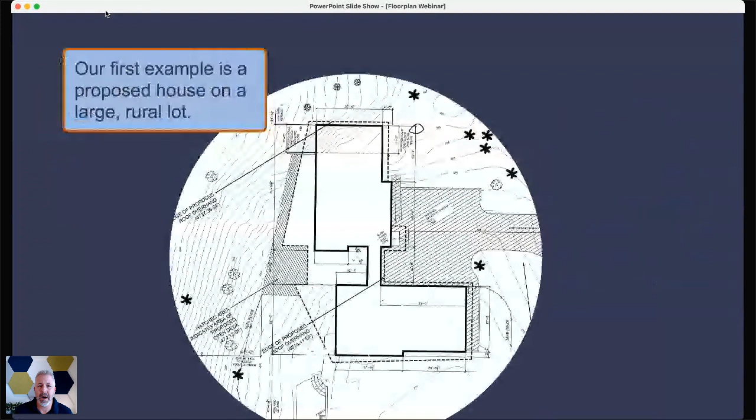So let's focus on the site plan for just a moment to set the stage for the floor plan. Our first house is a site plan of a house on a larger rural lot. The site plan is often one of the first plans you're going to see, and it's often based on a survey done on the property that shows where the property lines are and where the corners of the house are on the property.

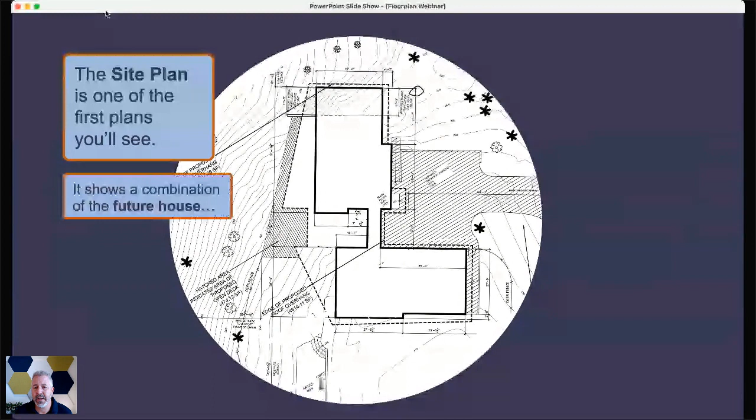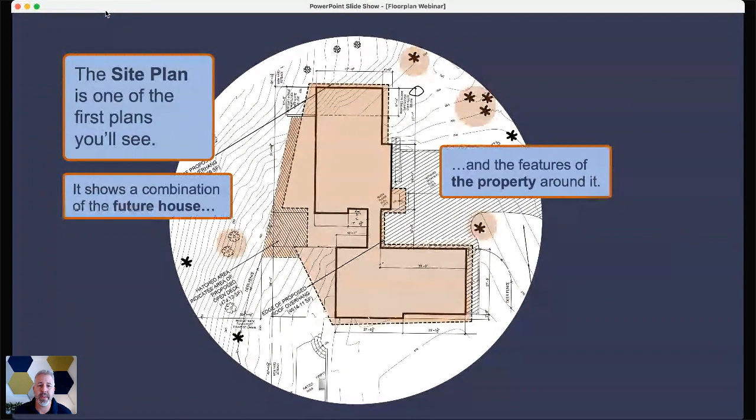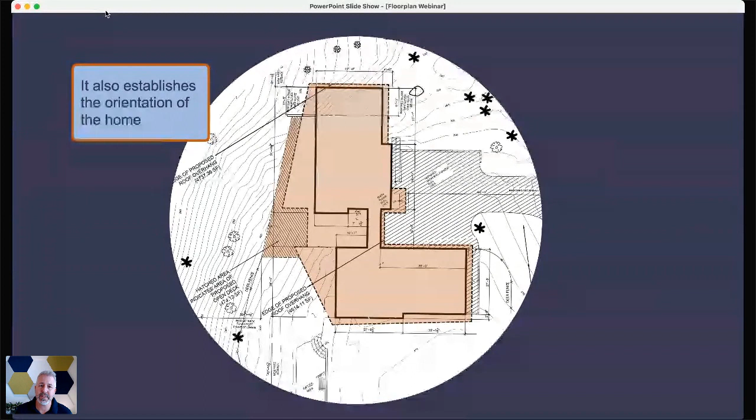It shows a combination of the future house on the site plan, as well as the features on the property around it. In this example, I'm highlighting trees that are part of this plan. It also establishes something important about the orientation of the house — for instance, if a house is facing a view, it's really important to make sure it's oriented in the right way so that it maximizes that view. By seeing the house in the context of the property, you can get a very clear idea of whether that orientation is correct.

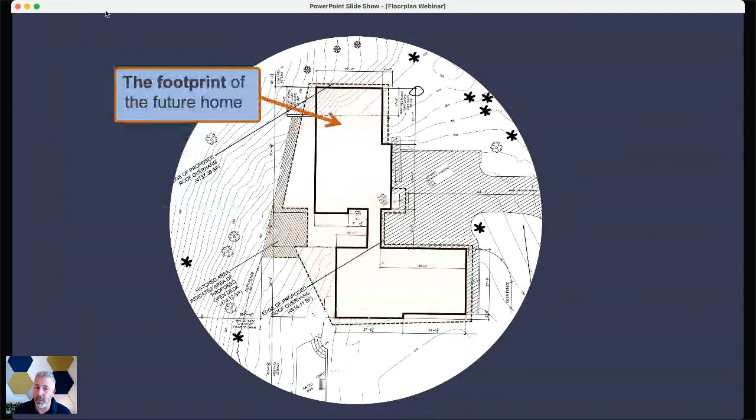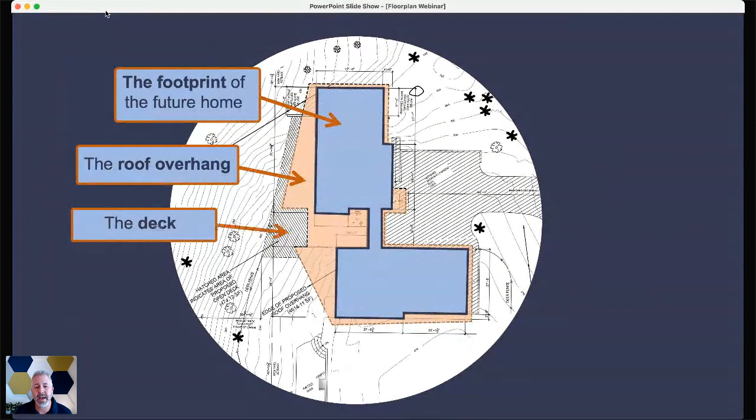So in the site plan, you'll see a few different things, usually indicated with different marks, like lines and hash marks. You'll see, of course, the footprint of the home, which is the insulated, lived-in area. In this example, we also see the roof overhang, which is important considering the orientation, because in places where the sun hits the home, you might want more or less overhang. That's an important thing to note, along with built things like the deck and the driveway, giving you a sense of the proportion and scale of all those things relative to the house's footprint.

Looking a little more closely, there are lots of lines and numbers here. One thing to notice is some basic home dimensions — in this case, this side of the house is 27 feet wide. The architect or designer are likely to add some notes about how the house is going to be constructed from a high level. For example, there's a note here about how this part of the house is going to be cantilevered over a sloped part of the ground.

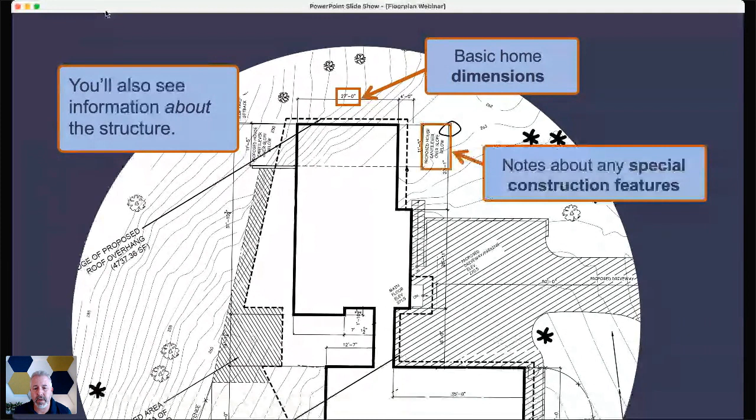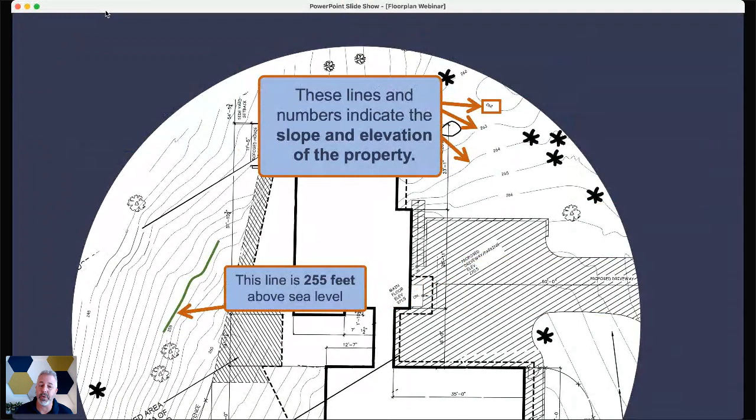Also, another really important piece of data about the home is the finished floor elevation, which is marked there. You'll also see these topographical lines that indicate slope and elevation. There are just a couple of key things to know about these lines and numbers. For example, if you look at the lower left here, you'll see this green line, and beside it on the plan there's the 255 feet above sea level number. Each of these lines represents 1 foot of elevation change.

So if I highlight another line here that's 245 feet, what the plan is telling us is that between these two lines is 10 feet of elevation change. And so when you're looking at the plan thinking, okay, here's where the deck is, what am I going to see when I look out on the deck? Well, you're going to see the ground sloping down away from you. That's an indication of the topographical look of the property.

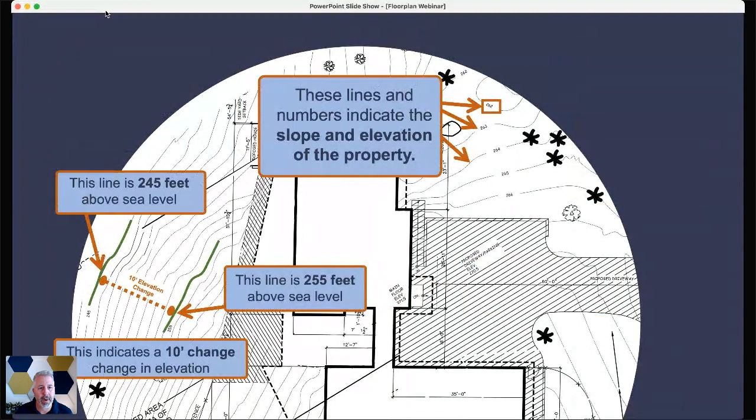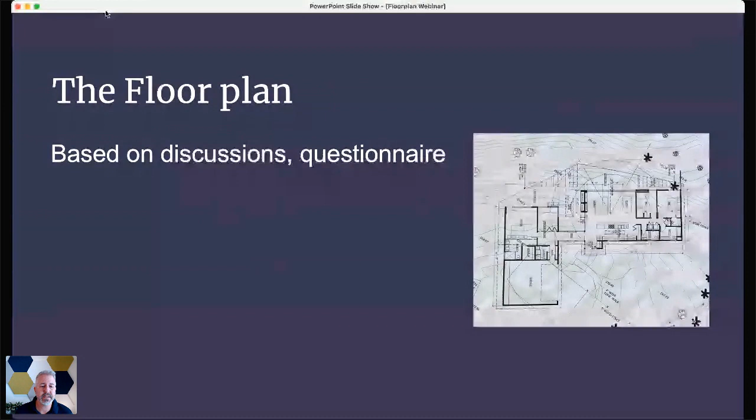So with those basics in line, let's go ahead and look at a floor plan. The floor plan is often based on discussions or a questionnaire where you've worked with a designer or architect to understand your needs, your lifestyle, your expectations, and budget. And it's really the source for the construction project.

Once the plans are permitted, you have a building permit, and everything is set, then it is the source for almost every team that's working on the project to be able to see where things go, how big or small they are, and how to build them. And really, the message of today is that the plan is an opportunity for you to design your home, to be a part of that process, and to be able to work productively with the architect or designer.

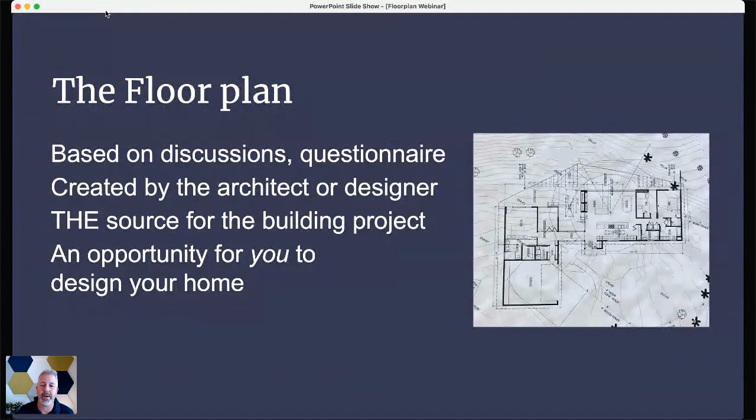So in the process of creating the Navigator course, we interviewed a lot of homeowners about their experiences and what they had learned. One of them, Darren Barefoot, used to work in stage productions and working with set designs where they have to get these sets on and off the stage for each scene. He told me a mantra they had at that time: if it ain't on the page, it ain't on the stage. I think that's a great mantra for homeowners to have when they're thinking about the floor plan, is if it's not in the plans, it's not going to get built.

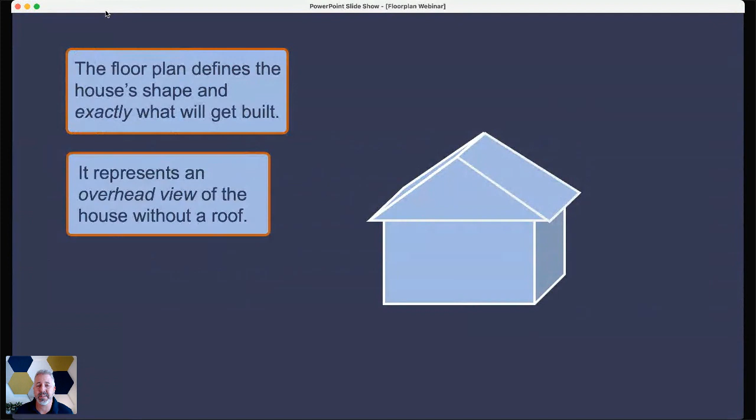Because the plans are the source, you've got to be really detail oriented and make sure that you understand how things are going to be built. The floor plan really defines the house's shape and exactly what will get built. You can think of it as representing an overhead view, as if you could take the roof off the house and look down—what would you see? That's really the floor plan.

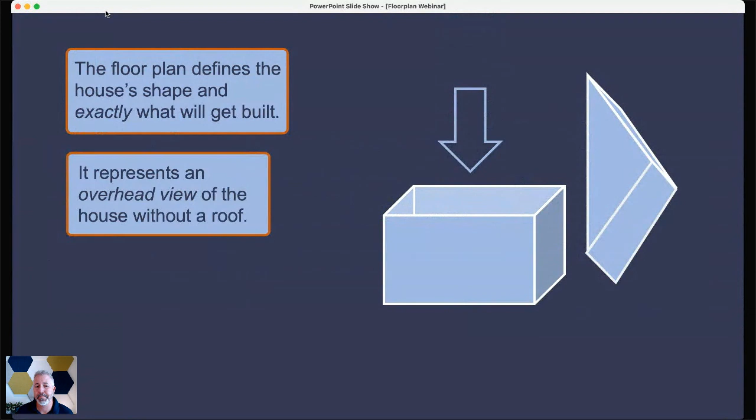So we're going to be using this example, which obviously looks quite complicated, but we're going to make sense of most of it. This version combines multiple elements, including windows and door specifications. Your architect or designer may have a different approach to the floor plan, so just note that your mileage may vary—these are not perfectly standard.

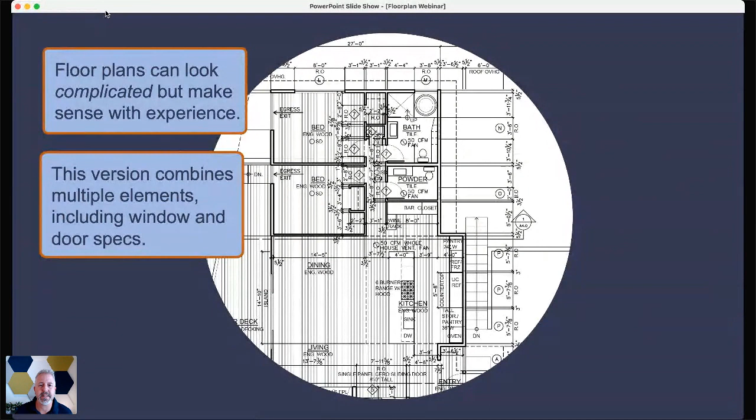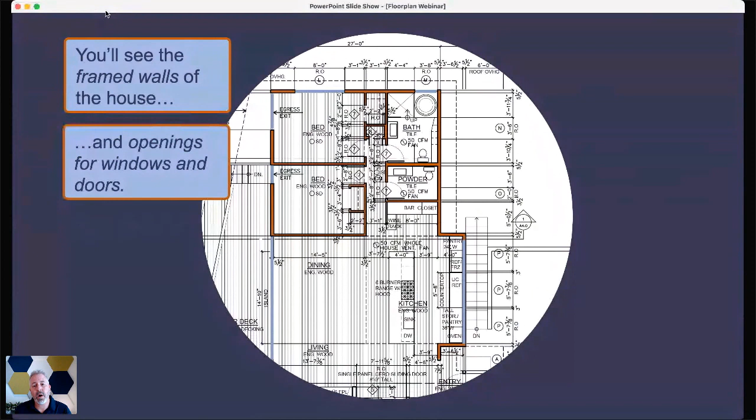So, of course, you'll see the framed walls of the house. These are often insulated walls or walls that define rooms, along with windows and doors. You'll see here in light blue. So the combination of walls, windows, and doors should represent everything that surrounds the home.

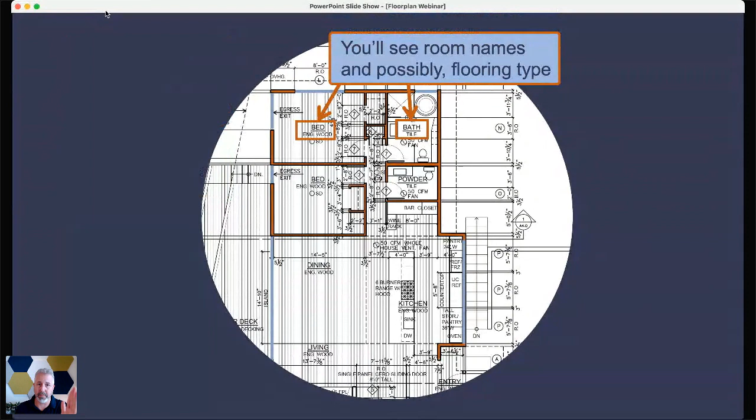It also includes the locations of features, fixtures, and appliances, and we'll talk a little bit more about that later. There's also things you're likely to see like code required elements. This is an example of showing the egress from a bedroom or a smoke detector. Part of the reason this is here is so that when a building plan is being reviewed by the people doing the permit, these things are very clear that they can see that. This helps your plans get through the permitting process by them being very visible in the plan.

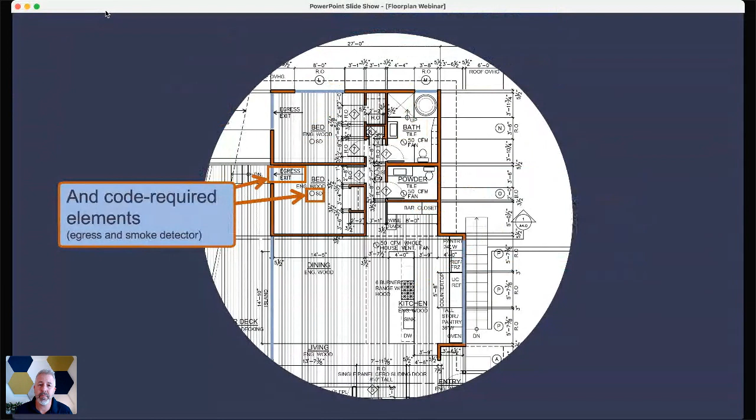So let's look at a couple of little details here that you're likely to see. You can see inside the circle here, there's the abbreviation RO. This stands for rough opening. So there's going to be a window here that's 8 feet wide, and that means when the framers build the building, they will have a rough opening of 8 feet. Then later, when you order windows, very detailed measurements will be made to construct the windows. So everything starts with a rough opening, as you can see here.

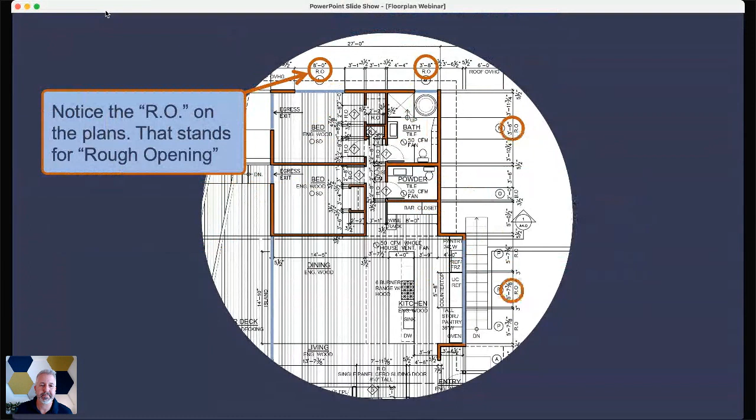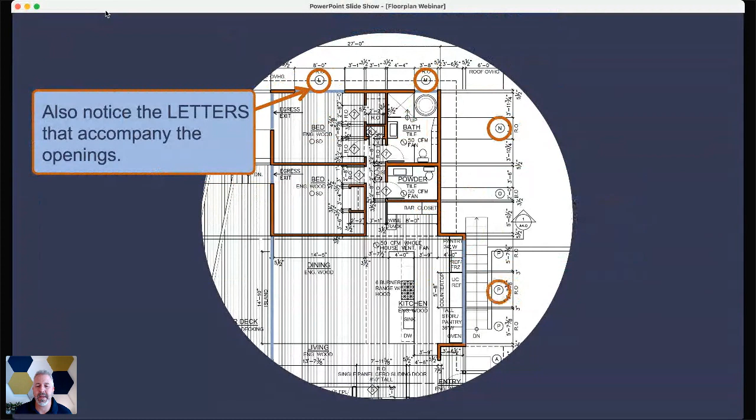So along with these rough openings for each window is also a circle with a letter in them. You can see here we have an L, M, N, P. These indicate the type of window for each opening.

Each of the letters maps to something called the window schedule, which is often part of the floor plan. It may be on its own sheet, but each of these letters is connected to a table that shows data on each kind of window, and also probably a diagram with dimensions, showing which way the windows open. Once you know how to read this part of it, you can go through every window in the plan and double check that it's the window you want, working the way you want.

So this is a key thing to notice.

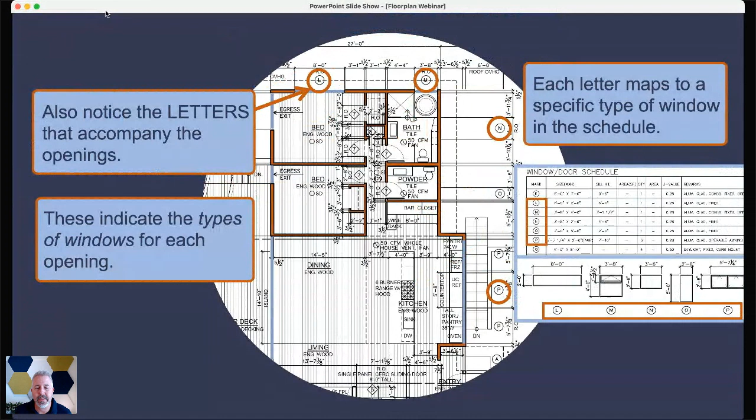Same is true with doors. We'll look at interior doors here. You can see that the doors in this hallway all have the number 7, so these are using numbers instead of letters. On the door schedule, a door with a 7 is a 2 foot 6 door by 7 foot door.

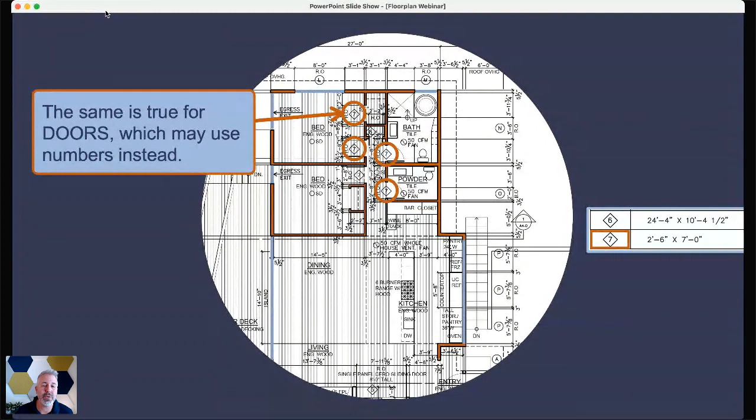As the homeowner, you can say, you know what, I think I want wider doors. What if we had a 3 foot wide door instead, or something in the middle? That's totally possible, totally something architects and designers are happy to work with you on. So keep that in mind as something you can make bigger if you want.

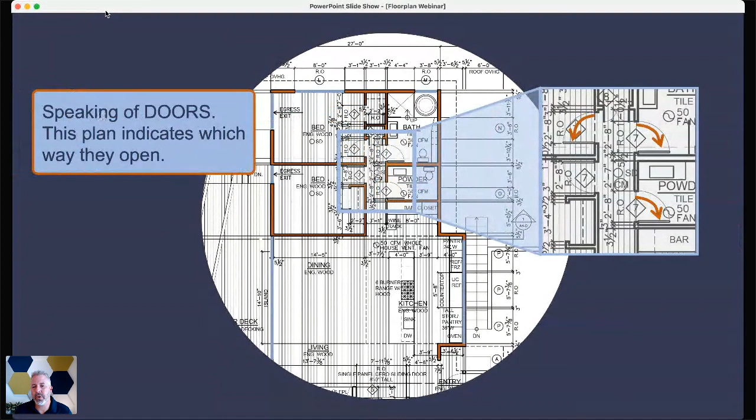Speaking of doors, this plan indicates which way they open or swing. You can see in the diagram that the doors have little lines showing which way they swing. This can seem like a small detail, but it really matters for the convenience and livability of your home, because once the doors are ordered and arrive, it's much harder to make them work differently. So you want to be really diligent about making sure they work for you.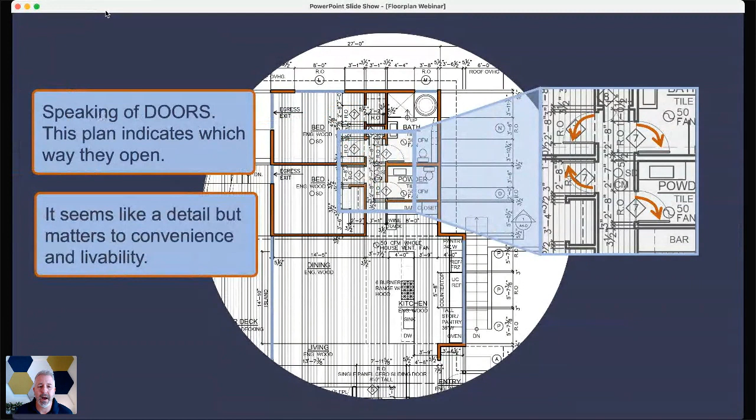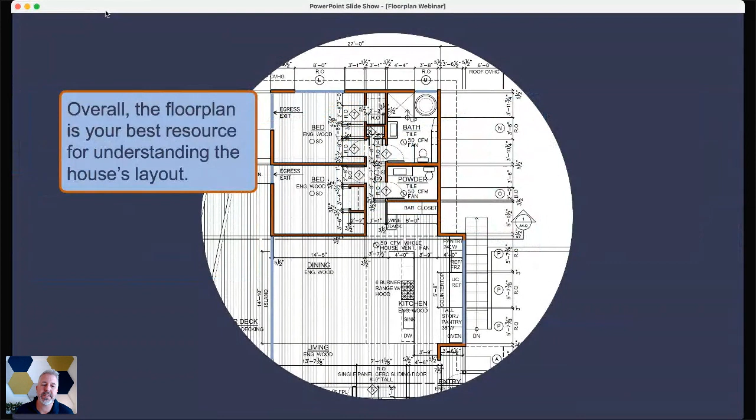Overall, the floor plan is really your best resource for understanding the house's layout, and the layout really relates to convenience and livability. I'm going to show you a couple of ways to think about that.

The first is this idea of flow. A really important point here is imagining how you'll use the space, like what paths are most common. I'll show you a couple here. This is from the bedrooms to the bathroom, something people are going to use multiple times a day, probably, and making sure it works the way you want it to is really important.

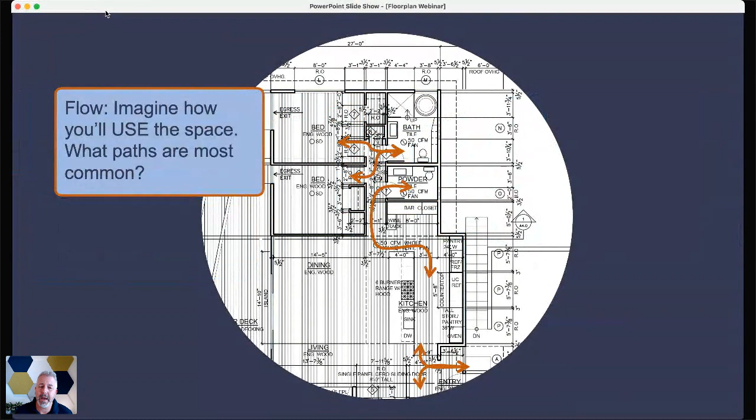Another one is moving from the kitchen to the powder room and back, or the entry into the home. The key here is asking yourself, on a room by room basis in the floor plan, what activities are going to be happening in that room, and how those activities connect to other rooms. What's the pattern of flow in that?

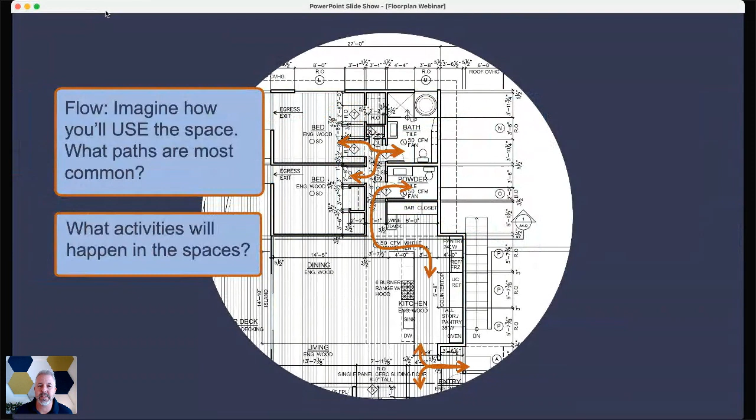Making sure the doors swing the right way and the lighting is in the right place is a really big key to maximizing floor plans.

Another thing to consider is imagining that you are standing in a doorway looking into a room. What are you going to see, what are visitors going to see? If it's a bathroom, there might be a toilet visible, or a window. You might think, gosh, I don't want visitors to see a toilet, so I'm going to make this door swing a different way, or move the toilet to a different location so that doesn't happen. Try to put yourself in the space, looking through a door, and imagine how it will work.

Another idea architects and designers focus on is alignment: are the major elements, the major structures of the house, aligned in a way that's pleasing? You want a design to be harmonious and to feel like there's a good sense of proportion. Looking at the major elements, I'm going to draw a line here - this comes all the way down the hallway and across the front of this kitchen island. You can see there's a very specific line there that's lined up really nicely.

The same thing with this exterior wall, across the other side of the house, the wall of the bedroom going across that way. And even within the bedroom, the window is lined up with the entry of the door there. These are all things to look for. If you see things, talk to your architect or designer - they're happy to help you work through what you think would be better.

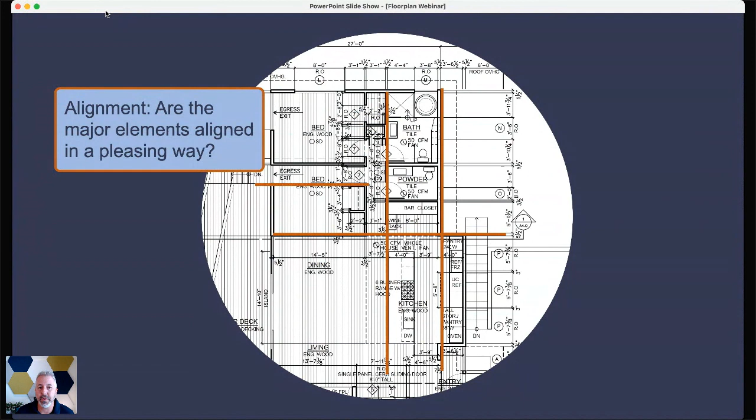So another quick example here. What we're looking at is a kitchen, and you can see there's an island here. This kitchen has 3 windows on the right side—you can see the 3 P's here. These windows are above the counter, and they really help define the kitchen space, dividing it sort of into 3 sections.

So these divide the kitchen into thirds. You think about what are the three things that are going to line up in rows here. And if you think about it starting right from the middle, in this case the range and hood in the kitchen are lined up to be exactly in the middle of the middle window. This creates a nice sense of symmetry.

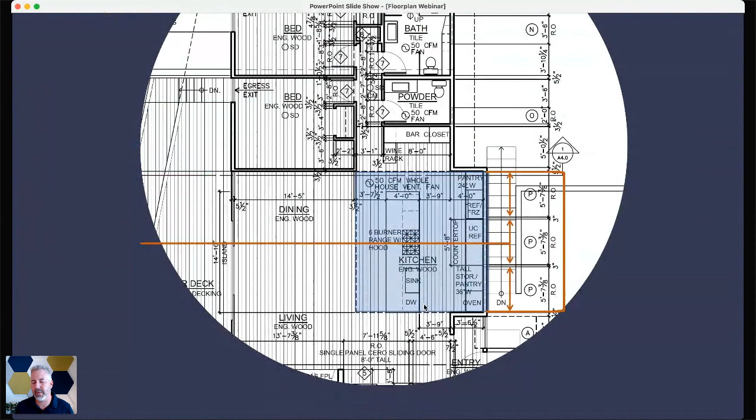Symmetry can be something that's really important. Not all builders and architects want something perfectly symmetrical, but in this case I think it's good. Again, just thinking in your plans how windows interact with the interior elements and how things are lined up is a big thing that helps it become more pleasing.

So let's talk a little more about fixtures like toilets, islands, and appliances, and these locations, because one of the keys to remember is that if you change nothing, if you look at a plan and say this bathroom is perfect, then that's what's going to get built. When the plumbers install the toilet hardware or the piping, they're going to do it like it's in the plan, unless you talk to them or make changes in the plan first. So be really diligent about that.

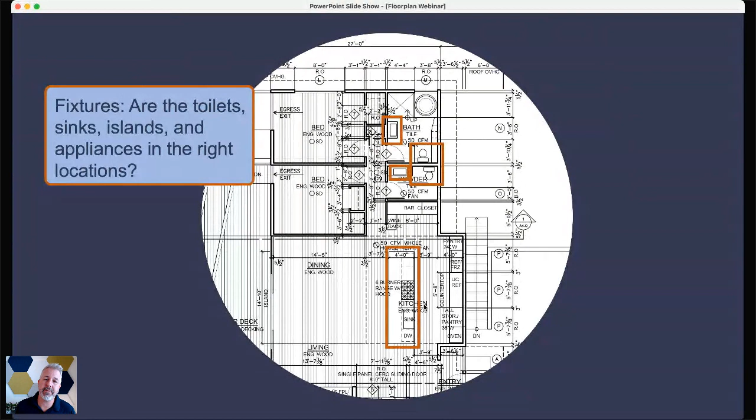Anticipate those daily activities and rituals that you do every day. An example I like to bring up is that most families make coffee or tea in the mornings, and that's something you can design for. You can think about having a coffee station—an outlet where you plug in the coffee maker, a place for coffee grounds, a sink nearby, a place for mugs, a place for coffee. It's just one small example of understanding what activities are going to happen and how the design can support it.

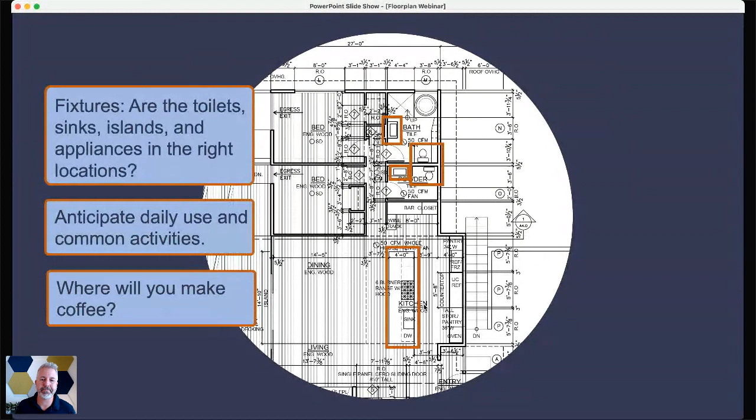So take the time that it takes to study the floor plan. I really encourage you to make changes on paper, because paper is the most affordable place to make changes. You really want to avoid glossing over the plans and trying to make changes once things become three-dimensional, because it's much more expensive.

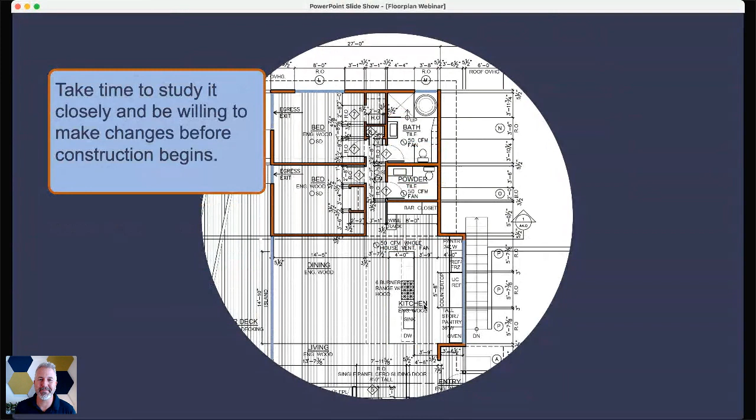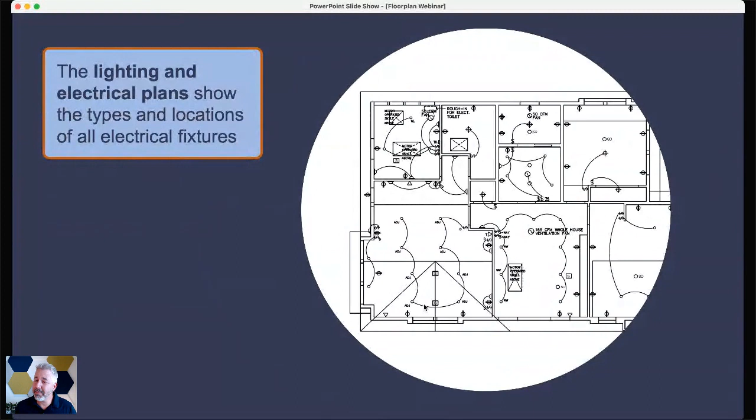Another plan you're likely to see that's really important to understand is the electrical plan. This is the example we're going to use today. It shows all the locations of fixtures and outlets and other things like internet connections throughout the home—mostly things embedded in the walls that are hard to move once the drywall goes on. So it's important to get them right early.

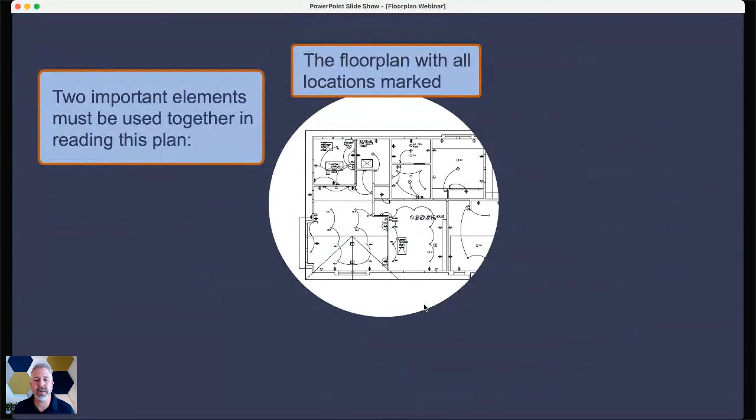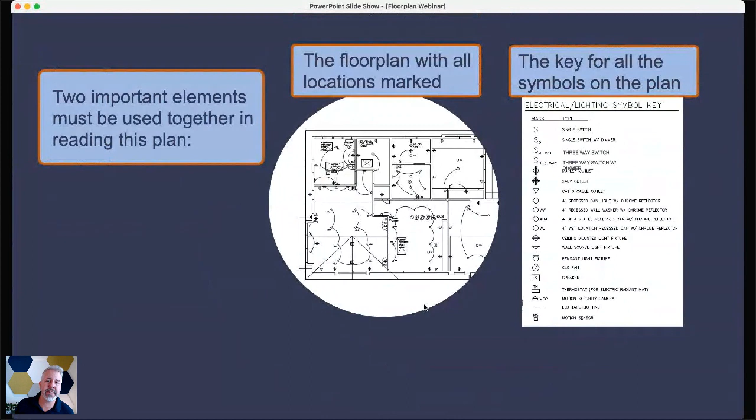Like the floor plan, there are a couple of elements that really help you understand it. The plan will have all kinds of annotations and abbreviations, and those all map to a symbol key for the electrical plan. They're pretty consistent across projects, but over time you'll learn what each symbol means and can just look at the plan and understand it. I'm going to walk you through a few of those as an example.

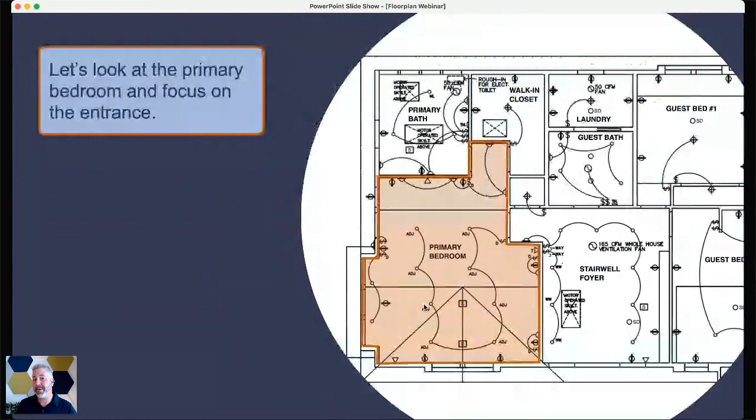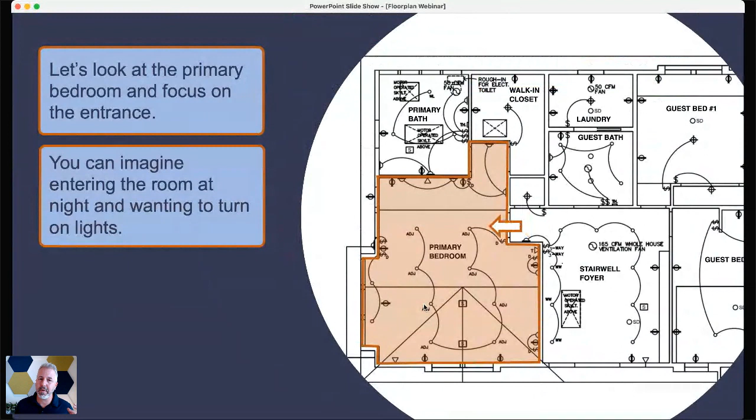Right now we're focused on a primary bedroom here. Think about it being nighttime—you're going to bed, you go through the entry, and you want to turn on the light. This is something we do every night. How does that happen, and what makes the most sense there? In this plan, we can see there's a switch by the door, which totally makes sense.

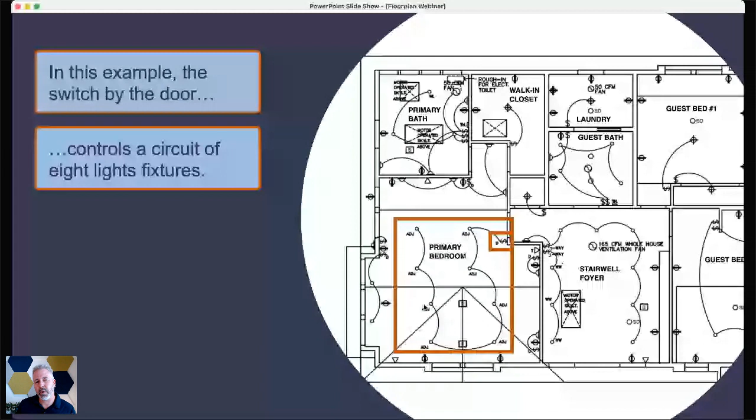We can also see that switch, because there's a line coming from it, connects to these 8 lights. So that is a single circuit—that switch controls the circuit. By looking a little more closely, we can see what that means. You see this $ and D—that's an annotation that is on the symbol key.

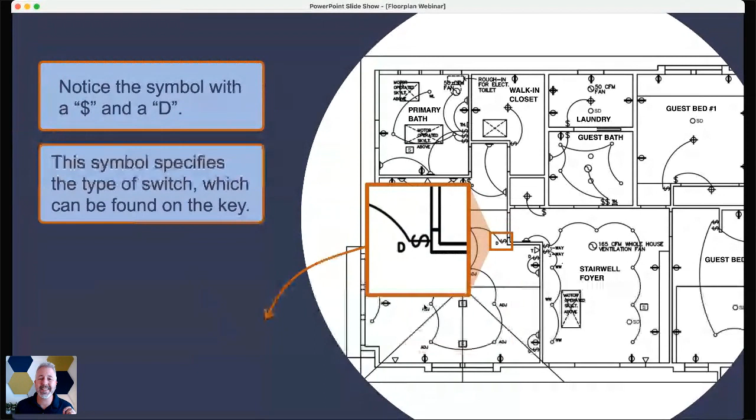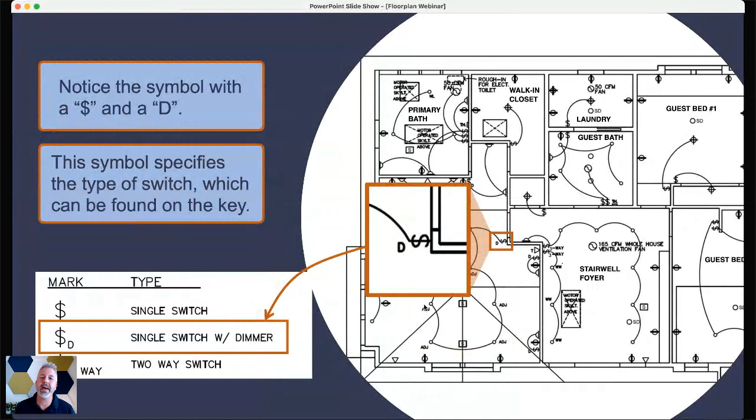When you look at the key, you'll see that means it's a single switch with dimmer. So the simple idea is that every annotation maps to the key, and you can go through the whole plan and make sure you understand what's happening at every location.

The same is true with the lights on this circuit. We can see that this also maps to the key. You can see the little ADJ there - that is a 4-inch adjustable recessed can light. So again, just an example here.

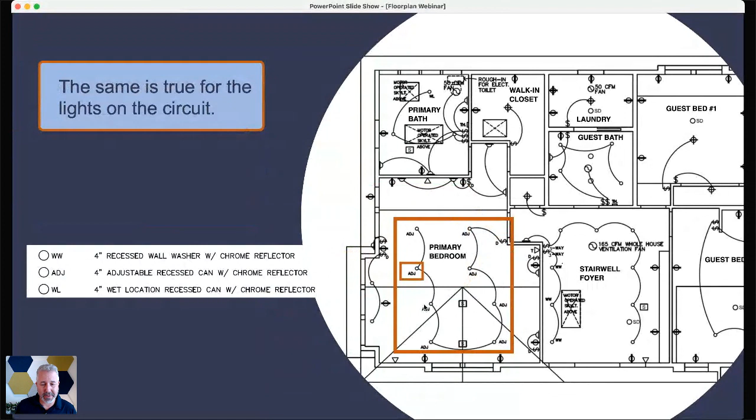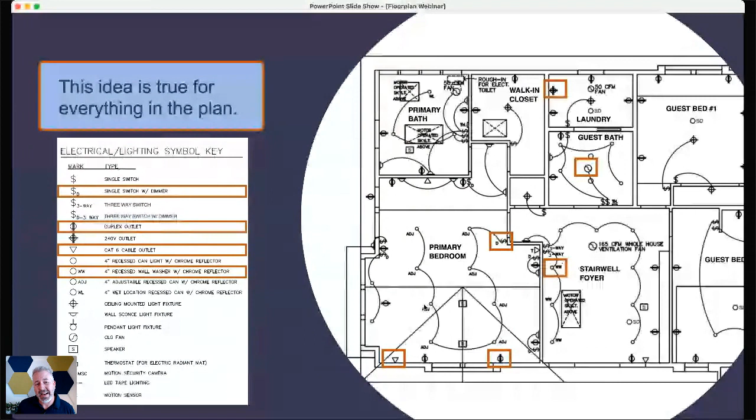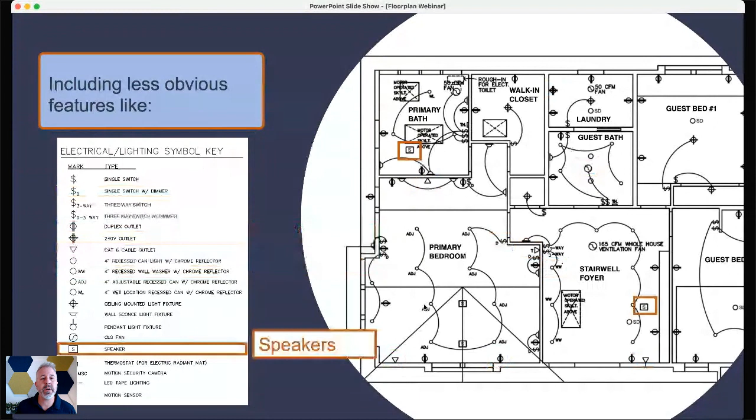So this idea of being able to identify everything happens throughout the house, and you'll see it documented. Remember, on paper this can all be changed. You can move lights, you can move switches, you can rearrange things, and that might even include less obvious things like network connections if you have an internal network, or even speakers on this plan. So lots of opportunities for improvement.

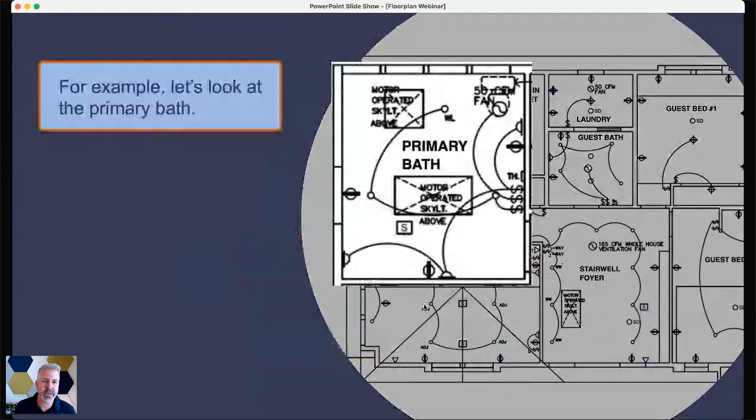So let's look just at this primary bath and talk through multiple switch situations. Here again, we're talking about entering a bathroom and wanting to manipulate the lights and switches. There are three switches designed into this bathroom.

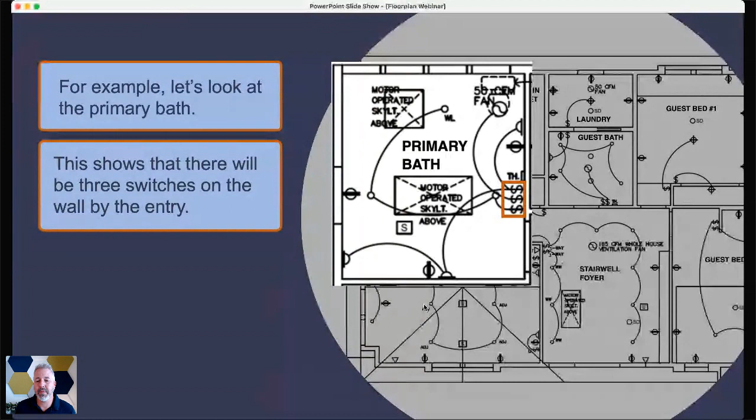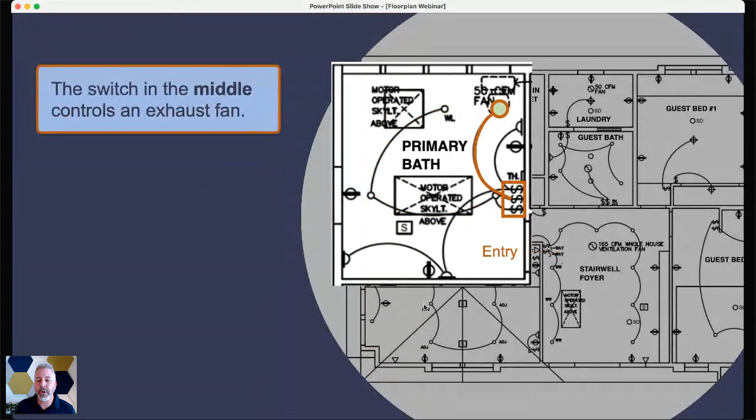When you come in the entry and turn, the switch closest to the door operates these three can lights. The second switch here operates an exhaust fan from the middle switch. And then the third light operates wall sconces around the bathroom.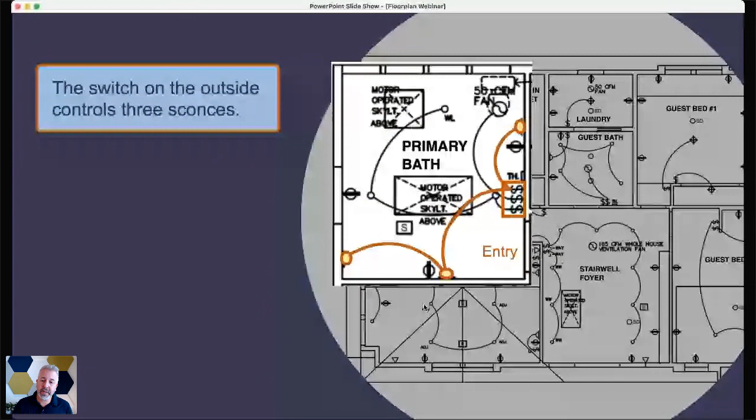Remember, if you make no changes to this plan, it will get built this way. The electricians will look at the plan and do the switches in this order. So you have an opportunity to ask yourself: are these lights in the right locations? Do I want these sconces and these can lights to be in the right place? And are the switches in the order that you want on the wall?

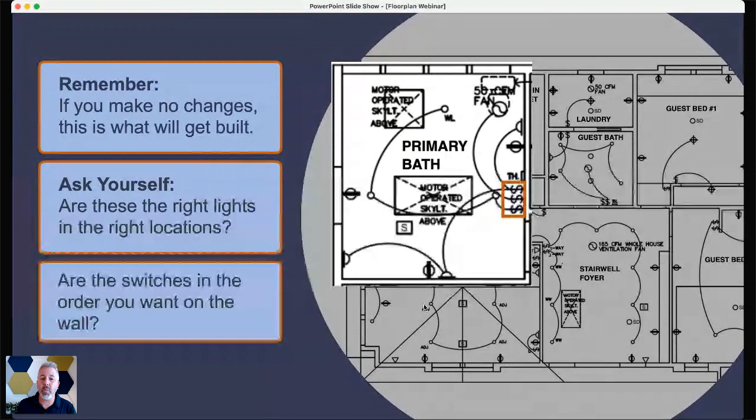Would you rather have the exhaust fan third versus second, right? These are all changes that you can make, and they extend throughout all the plans.

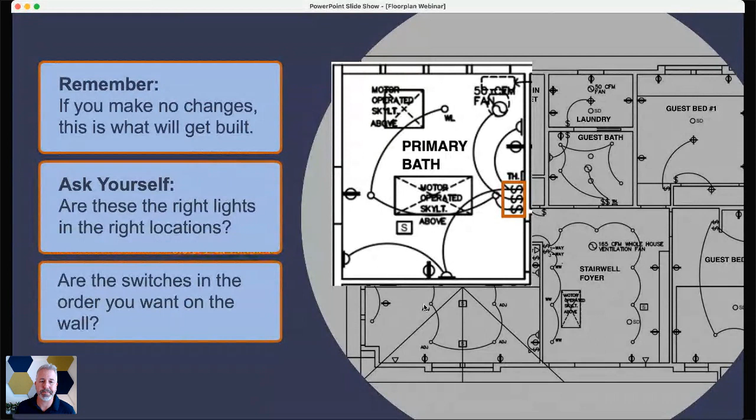So in thinking about these examples, your architect, electrician, and builder may be the best resource. I really encourage you to talk to them, ask questions, ask why things are designed the way they are. You'll learn, but you'll also find opportunities to improve.

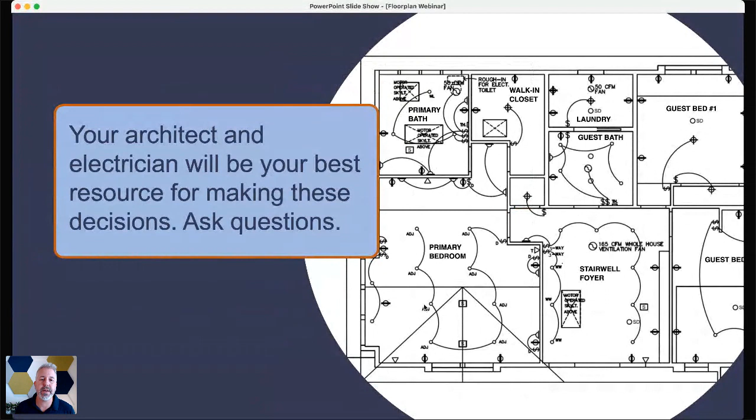So a really quick example here about three-way switches, which is a source of confusion for some homeowners. I'm hoping that this example will help.

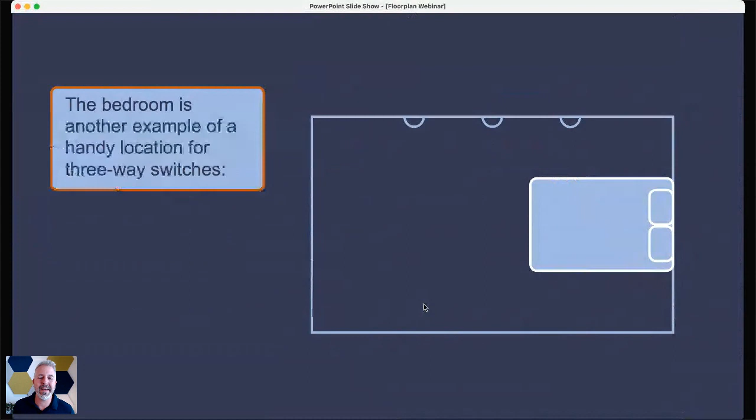Imagine that you're going to bed and you enter and you turn the bedroom lights on. So they're on, and then you walk into the bedroom, maybe you change clothes, get to bed, and think, oh, now I have to get up and go back to the door to turn the lights off, right?

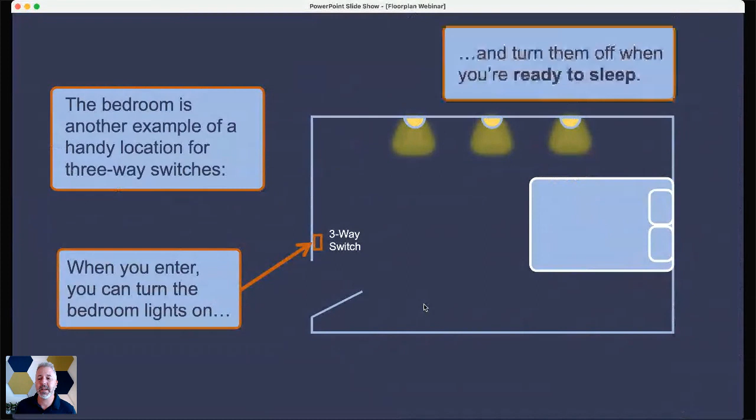So this is a common use case for a three-way light, where actually you have another switch beside the bed that's connected to the one by the door, allowing you to turn the lights off from the bed. So that's the basic idea of three-way switches: multiple switches that control a single circuit of lights.

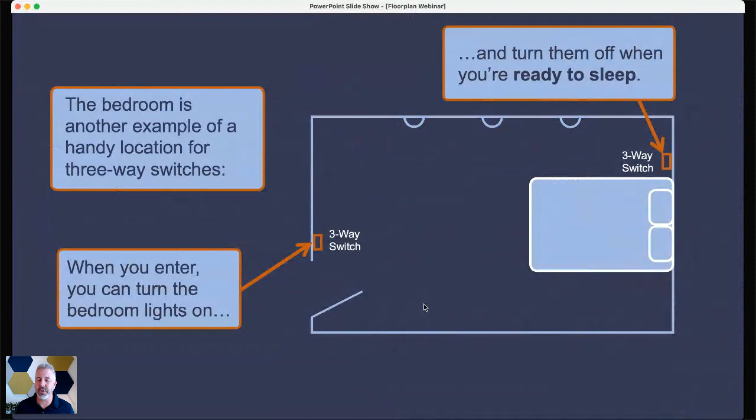Again, your builder and architect will have a lot more information about the best locations to do that and how to think about it. It does often need to be built into the wiring, so you'll need to plan ahead.

If you're interested in working on your own floor plans and want it to be really easy, not having to learn something like CAD, there are a number of products out there like the Room Planner app, Room Sketcher, and Floor Planner. These are something we mentioned in the Navigator course, and they can help you get started more quickly.